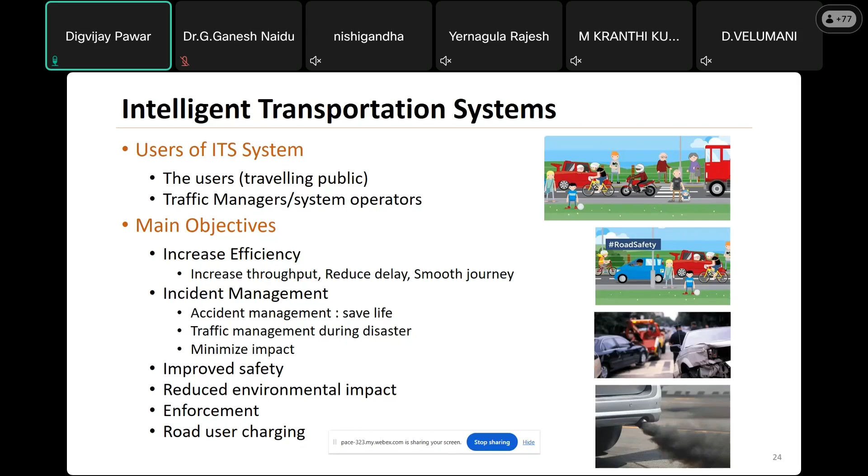So these are some classic examples of ITS, like advanced traffic management system, traveler information system, vehicle control system, and toll collection systems. In general, we term it as advanced transportation systems.

So the overall picture, if you look at ITS as such, the context is: you monitor the traffic, whatever way you can, you assess the system, and you act on it.

The monitoring of the system can be done in several ways. It can be based upon sensors deployed on the road, cameras deployed on the road, or manually, like a traffic police standing at a junction trying to monitor the traffic. That is one way of monitoring traffic, but it's not an effective way.

How can I see the whole system? How can I have an overall picture of the system, in a way that helps me understand the bottlenecks, understand where exactly the traffic jams are happening? That's the reason why you see smart cities deployed with a lot of cameras, just to understand where exactly the traffic jam has happened, why it has happened, and can I provide quick access to the location to resolve the issue.

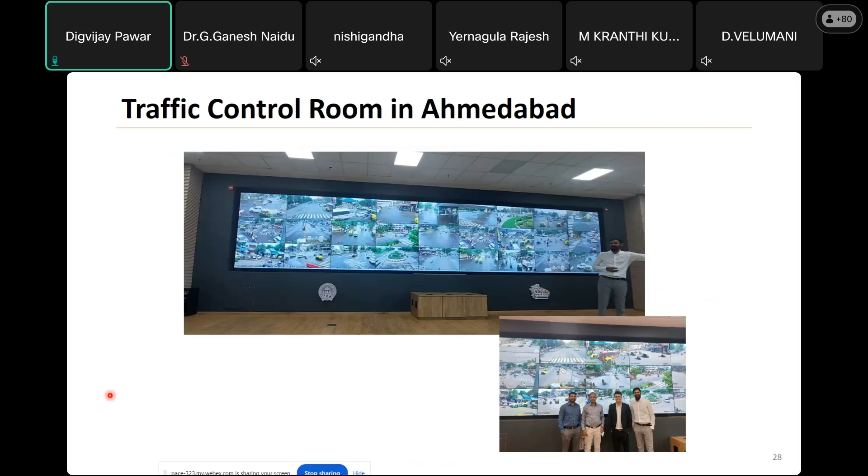Then you have this, let me show the cursor. Ahmedabad has an excellent traffic control room. I forgot to mention the date, but this was pre-COVID, late 2019 possibly, where we visited Ahmedabad's traffic control room and observed how exactly the whole traffic management is done. Even the generation of the challan is automatic, fully automatic. The intervention from the traffic police is very minimal.

What kind of precaution needs to be taken care of? There is vigilance - people observe things happening on the roads. The information is given to the traffic police then and there itself, and the issues are resolved. So this is one classic example of ITS, where you generate the challans automatically.

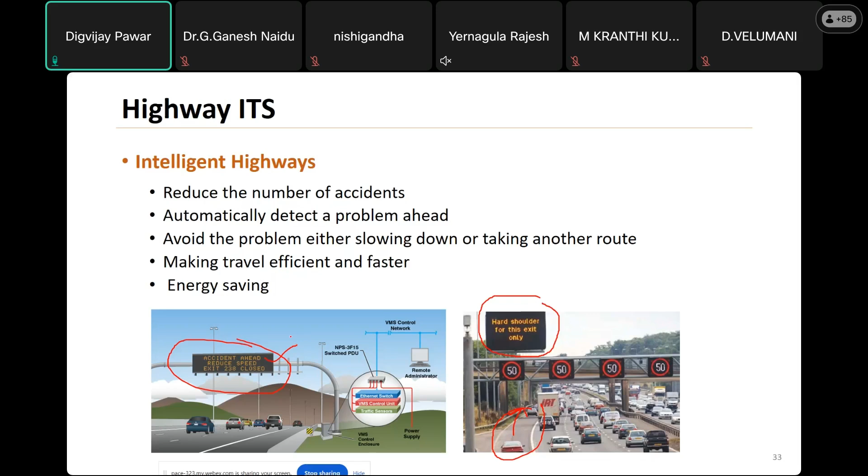This specific VMS says accident ahead, reduce speed, exit 230 closed. When we have such information in advance, this helps people to plan, right? So that is the beauty of advanced transportation systems.

Then we have variable speed signboards. This is an actual photo which I clicked in Melbourne in February 2019. These are the signboards, and right now there's a uniform speed displayed on different lanes - 50, 50, 50 - which implies you need to maintain those speeds. However, the speeds can vary based on the lane you're targeting. The speed limit changes according to the current environmental and road conditions and is displayed on an electronic traffic sign.

This is documented in a concept document. For example, during early mornings when there's a foggy situation, you can put a speed limit of 40 on a variable message sign. It usually indicates a maximum speed and may also list a minimum speed that you want to maintain. The concept of minimum speed is very important for all of you.

This is especially true on expressways, which is why you don't see a mix of vehicles there. We don't allow two-wheelers or auto rickshaws on expressways because they travel at lower speeds. When you have a mix of high speed and low speed vehicles, the speed differentials are quite high, and the moment you see a high speed differential, there are high chances that crashes may happen.

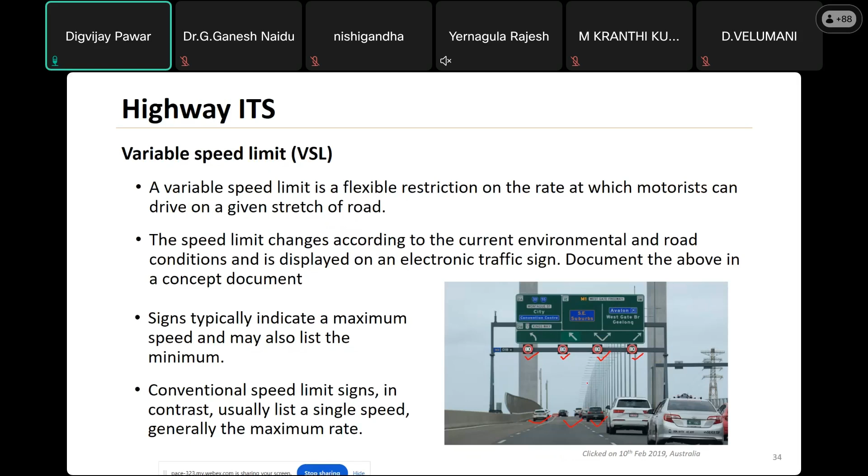Well, that was more about safety, and sorry to divert, but I feel that's very important for us to understand. This is another photograph with very interesting information for users about where exactly the left lane is—for the Science Works Museum, you take the left lane only. There is also information given about speeds.

This is a VMS, a variable message sign, which displays information about a tunnel closure, on a Sunday, 10th February, from 10 p.m. to 5 a.m.—quite interesting information. On the same day, they mention there will be a tunnel closure, giving advance information to users so that drivers are not subjected to unnecessary chaos, otherwise there would be a long queue with people unaware.

So you simply inform them in advance that this will be happening.

When you talk about concept of operation, the intent is to determine the key factors important for operation of the corridor. It's more about forming a view on how ITS can help manage these key factors, documented in the concept of operation document.

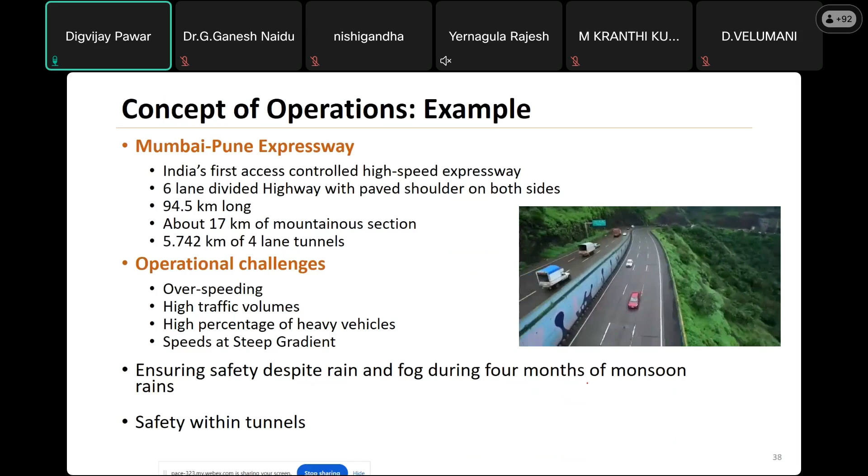There have been incidents where people suddenly start overtaking from the left. Imagine there are trucks ahead of you, queued up, and you realize there's a left lane which is empty when you're slightly behind. You suddenly move to the left side and realize there's a vehicle stopped. You're moving at 60, 70, and the stopping distance available isn't enough to stop safely. You will just kill these people. That's what has been happening.

This is the actual reality. Even though we put up the boards, people are still stopping.

If you look at the statistics, till April 2018, a total of 105 accidents were observed, 102 people injured. In 2017, 99 people were killed and 375 people were injured. Look at the statistics, how many people are actually involved in crashes.

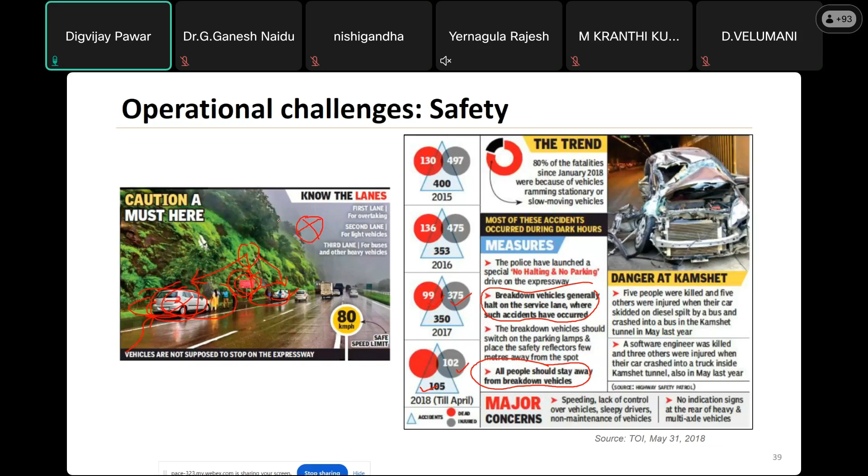These are really important things that need to be addressed.

Then you can have SOS, save our ship or save our soul. It's an emergency box, call box, where you simply dial the number. Even if you use this number, it goes to 1033, and from there they connect with the local incident management system, the meteorological system, where you're able to predict sometimes there are sudden rains.

Can I predict in advance and give warning to the driver? Possible. And then there are systems like weigh in motion, so I don't have to stop my vehicle to wait and create the challan for weighing. Because overweight vehicles will be issued a challan, you have to pay as per prescribed or legal limits. So can I do weighing on the go? Yes, it's possible. High speed weighing in motion is possible, where you can save time of truck drivers and so on.

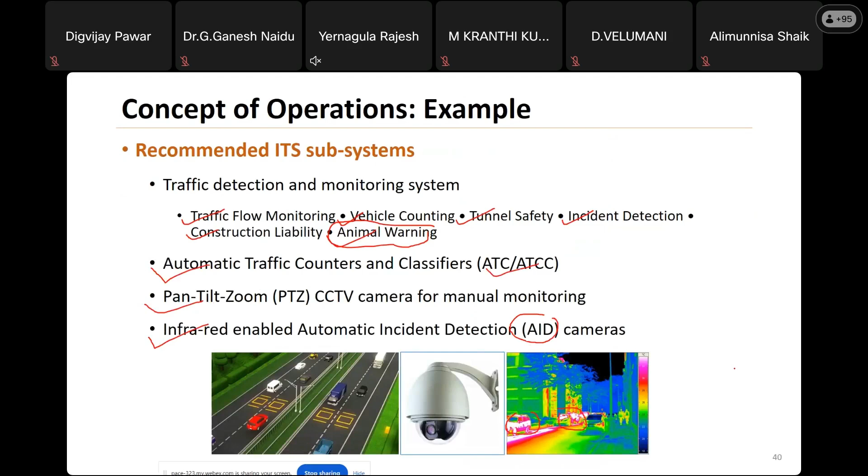Excuse me, sir, you are on mute actually. I just got muted, or was it muted before? Sir, let me check, just got muted, sir. Oh, thank you, thank you. Should I go to the previous slide? Yes, sir.

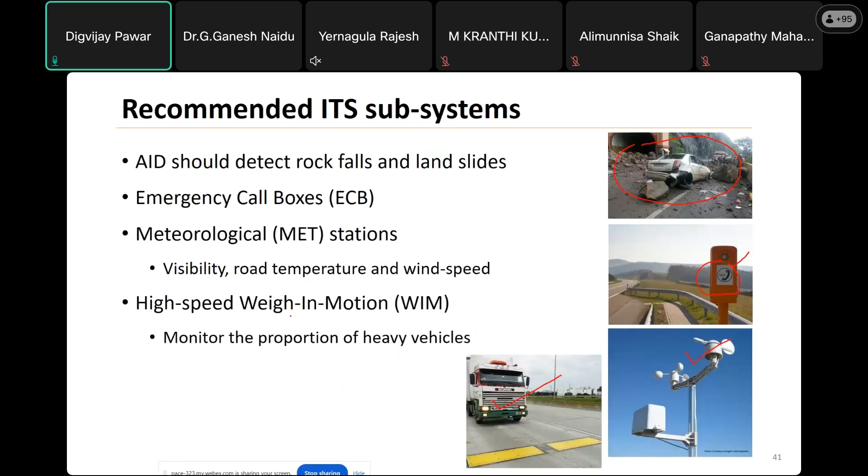They were able to hear about this system, like AID should detect rock falls. Yes, sir, they were here about this system, sir. Just the introduction, yes, sir. This slide was there. Okay, thank you. Thank you so much.

Excuse me, sir. Sir, again it got muted, sir. Sorry for the inconvenience. Yeah, now I'm able to. Oh, so yes, yes, I think it's happening from the other side because I'm not touching the screen. Could you look into it? Okay, please sir. Yeah, yes, yes, sir. We'll check with the team, sir. Okay, thank you so much. Thank you, sir.

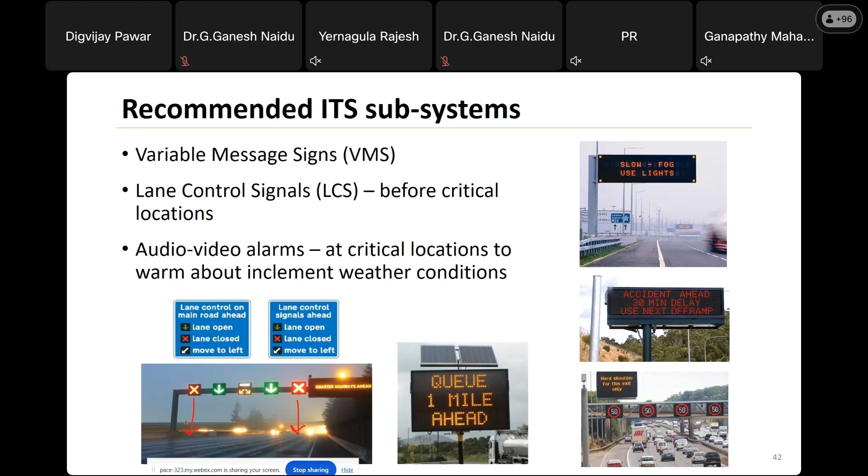So I was talking about the lane closure, the smart system which will actually help road users understand the lane closure beforehand. I was talking about hazard lights, right, all of you. Quite often we use hazard lights during fog, and we think our visibility is high, or other people are able to see. But please understand, in order to differentiate the vehicle which has broken down from the vehicle which is moving, we use hazard lights. So hazard lights are only meant to be on when your vehicle is in breakdown condition, not when it is moving. At that time you should just switch on the fog lights, the red tail lights, they are good enough to warn or inform the drivers behind you, especially the following vehicles, about the presence of the lead vehicle.

If you look at the overhead VMS system, it's displaying accident ahead, 30 minutes delay, use next off ramp. So if somebody is telling me there's already a crash ahead, then I don't need to commute at 100 or 120 kmph on expressways. I can go with the minimum prescribed speed, let's say 80 kilometer per hour, so that I can save fuel also. When you travel at higher speeds, the fuel consumption is high, and there are more emissions.

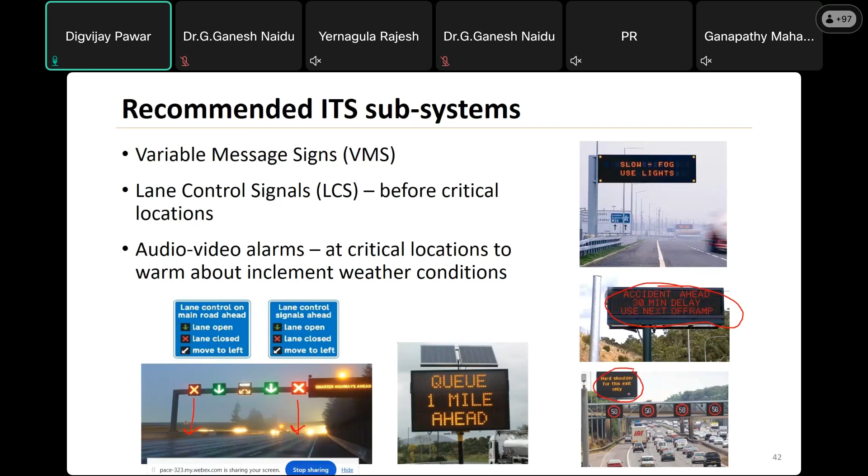Rather, I'll drive quite efficiently. Here also is a hard shoulder for this exit only. We have seen this previously.

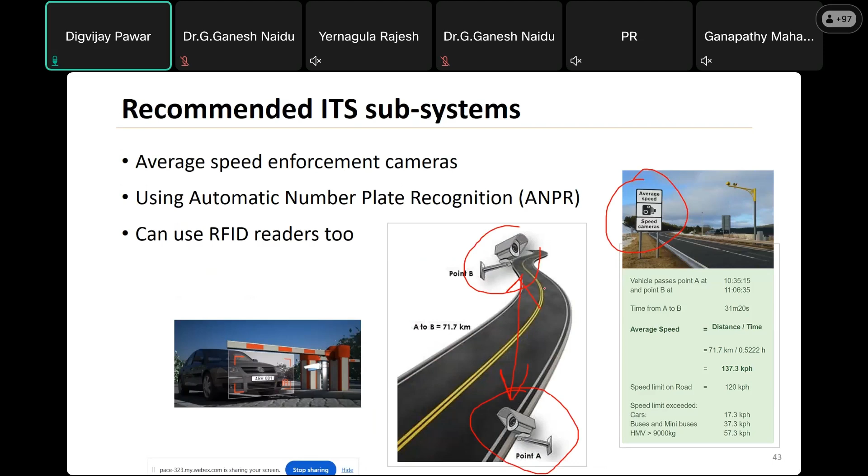Then there are very interesting systems, such as the average speed cameras, which are quite effective. You use two cameras at two different locations. You know the distance between these two locations, and based upon the time taken by the vehicle to cross point A and point B, you simply find out the speeds. With a fixed base system, like one camera or sensor detecting speed at a particular location, people over time learn where exactly the camera is placed, and only at that location will they reduce speed. That is not effective, because people learn where the location is and adapt accordingly. So how can I avoid that? I'll measure the average speed between the two locations and then issue the challan to the users.

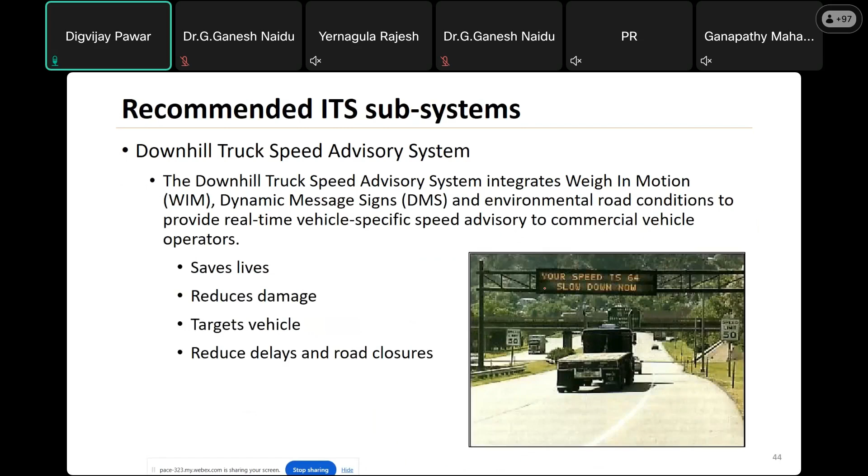Then there are downhill truck speed advisory systems, especially for trucks which are heavily loaded. They cannot stop easily because the brakes fail when they continuously apply brakes, getting heated up and reducing brake efficiency. So this system gives a warning to the trucks that your speed is 64, slow down. It tells you in advance that you need to slow down, or else you won't be able to control your vehicle.

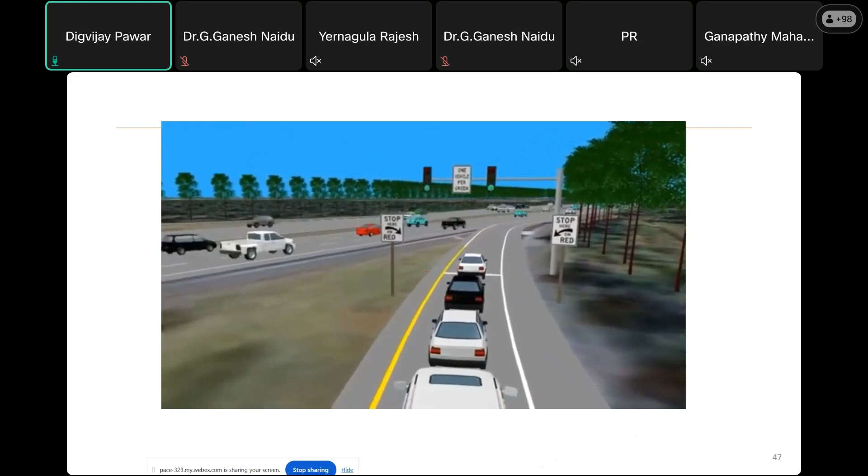Let me show you how this exactly looks. There's a ramp meter: when flashing, it means prepare to stop, giving a warning in advance. Once the vehicle approaches the signal, it works like a normal signaling system, but the operations are quite quick. As soon as you get a green light, you go; red, you stop; green, you go again, one vehicle at a time. But when there are multiple lanes on the ramp, you allow those multiple vehicles to proceed accordingly, and even the acceleration lanes are managed.

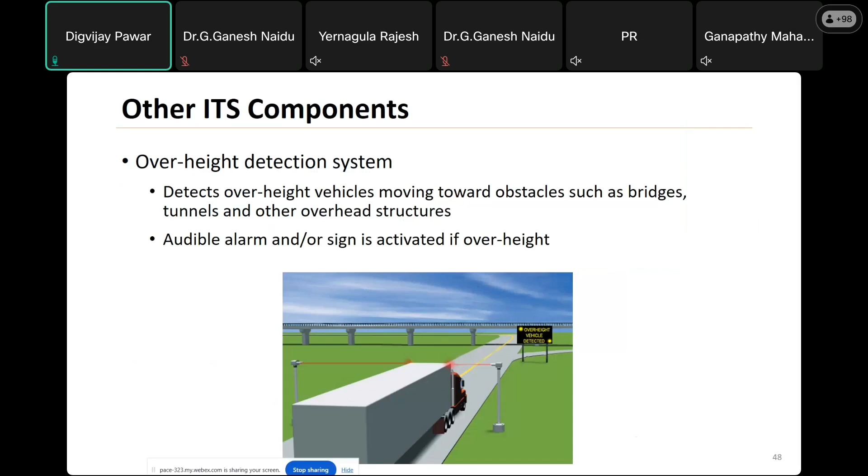Then there's the over-height detection system. In India, you see horizontal metal bars placed on top so that heavy or overheight vehicles get stuck at that location and don't damage the property ahead, for example a bridge. It's a costly affair if that happens, so this gives warning in advance.

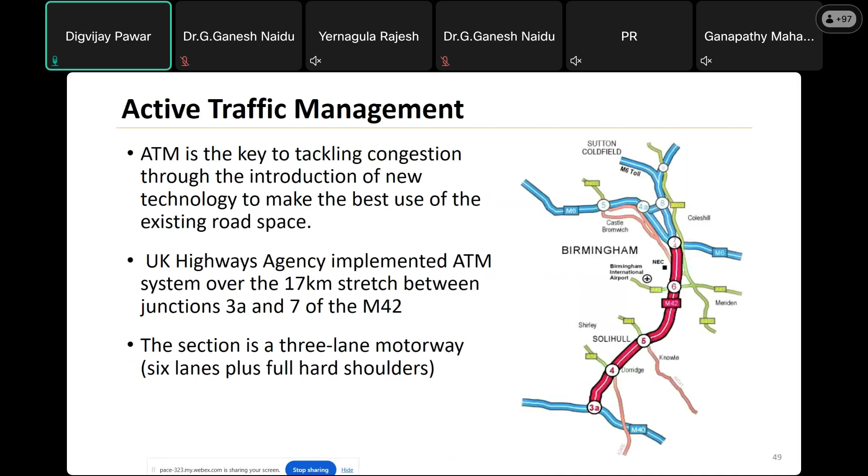So, one such active traffic management system—in fact, I witnessed this system when I was in the UK last year—let me directly go to the system, since we have the last 5 minutes.

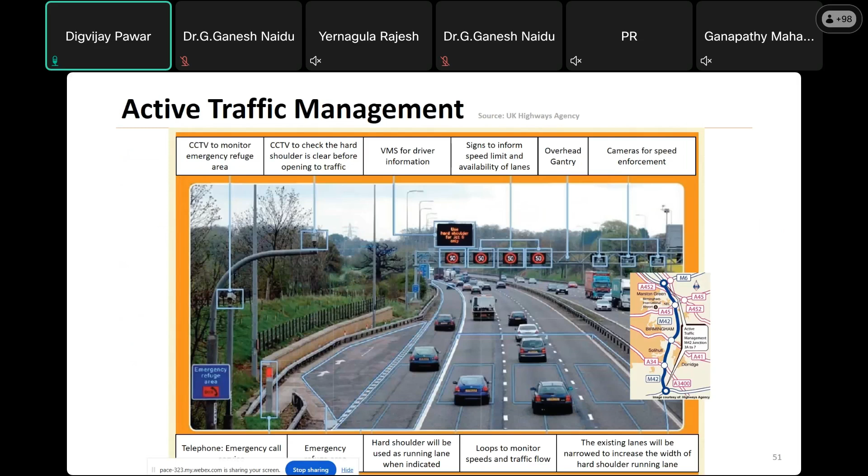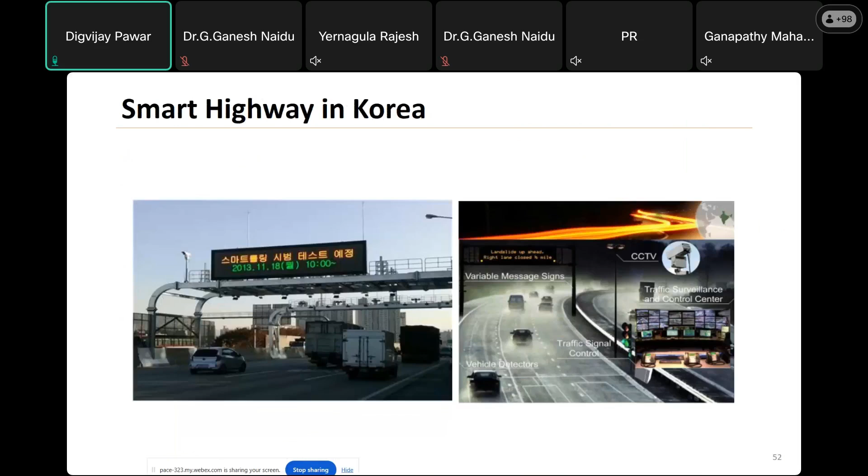This is a smart highway in Korea, which has variable message signs, vehicle detectors, traffic signal control, CCTV cameras. Nowadays, these all exist on Indian roads also. It's all about the efficiency of the system, how well it is working. Quite often you see these systems are always under maintenance.

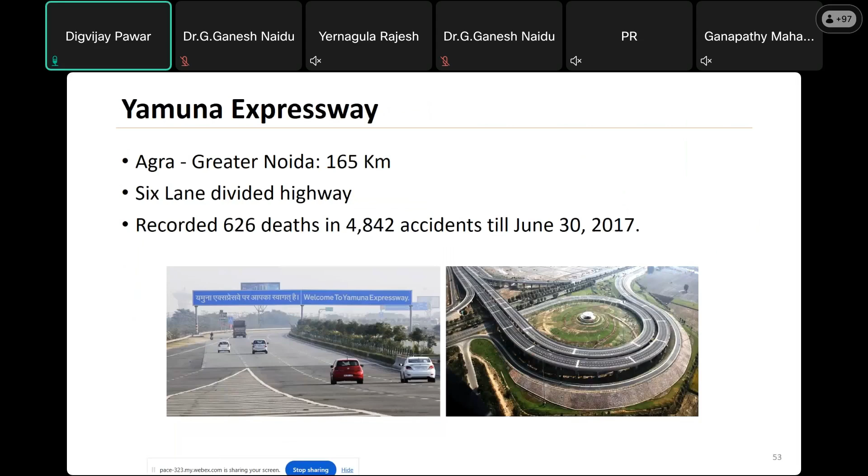This is Agra Greater Noida, Yamuna Expressway. It is a 6-lane divided highway. It recorded 626 deaths in 4842 accidents till June 30, 2017, and the major issue was fog. You could see early morning people traveling at really high speeds.

Some of you might have come across this video where people are bombarding onto the vehicles, requesting them to come out quickly. So can I give a warning to the users as soon as possible? Yes, it's possible.

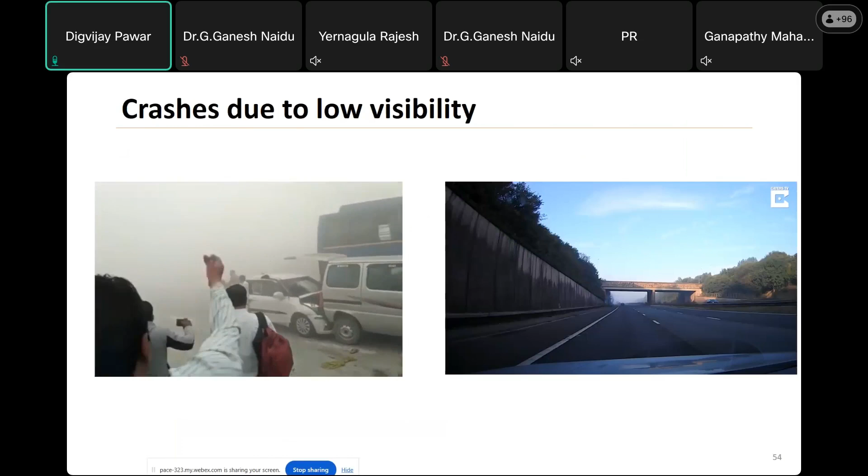Of course, there are several challenges in the Indian context. We have underdeveloped road networks, severe budget restrictions, explosive urbanization and growth, lack of resources, less demand for automation, lack of interest, lack of user awareness, and so on. So this is all about the development.

But I remember we had exclusively one specific question about autonomous vehicles in my previous lecture, so let me talk about the challenges with respect to autonomous vehicles.

So I have 5 minutes, right, Dr. Ganesh? Yes, sir, yes sir, you have 5 minutes. Thank you so much. I started a bit late, so I think I'll use that time. Let me just open the PPT. Just give me 1 minute.

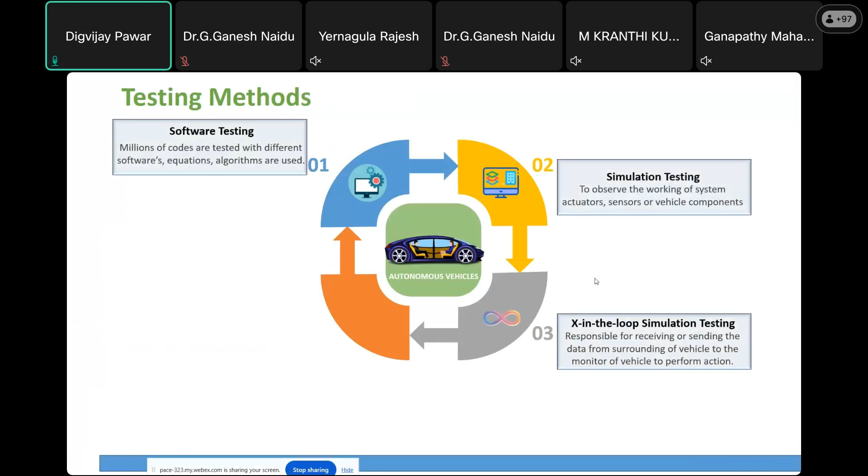We already discussed SAE levels for different types of autonomy, and mandatory testing for ADAS, especially collision avoidance testing, lane departure warning, blind spot detection testing, GPS testing, and what kind of testing needs to be done. These are different testing methods: software in loop testing, simulation testing, X in loop simulation testing, driving test in real traffic, and so on.

So whenever you develop a test track, which I talked about, the intention is all about the type of testing that you want to do: accelerated evaluation, behavioral competence, or checking corner cases.

That means you want to push the limit and do highly advanced limits of the highly advanced automated vehicles and so on. And then some mandatory AV sensing systems that we have actually suggested. So these things I will not present, which is more about the regulations that I have designed for autonomous vehicles, and the kind of regulations or testing they should go through.

I visited a Michigan test bed at the University of Michigan, and I've seen the test bed facility over there.

At IIT Hyderabad, we have been working on several research domains. One is to do with the simulator, virtual reality, and assisted driving data, and so on. However, it all has its challenges, especially when it comes to autonomous vehicles in the Indian context. You can see how exactly the challenges are being observed.

Now, to answer one specific question related to the ethical dilemma - yes. Please understand, there have been incidences where even to save a dog, the driver has steered the vehicle suddenly and has killed all the occupants within the car itself. So there would be high chances that the vehicle would be in a better position than human beings to take the decisions instantly.